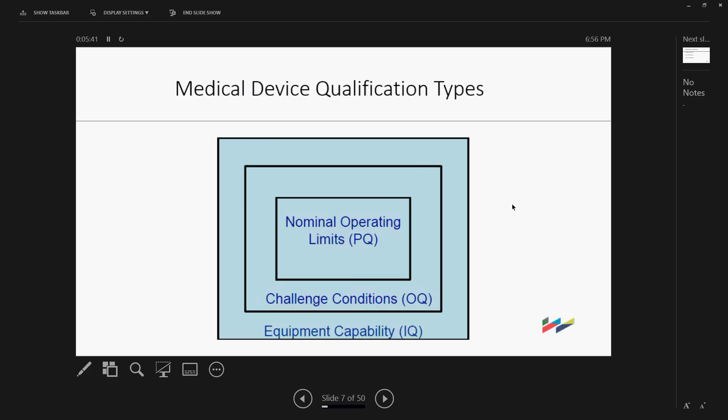Okay. Oops, there we go, okay.

So in qualification, for equipment, they have 3 phases. Installation qualification is the first phase, and the question you should ask yourself is: is the equipment set up correctly, and does the equipment meet its specifications? So if you have 1,000 watts, does it really put out 1,000 watts?

With the operational qualification, which is the next phase, as I said earlier, it's where does the process break? And so once you understand when it breaks, then you've got those limits, those process windows set.

And then the performance qualification is: what are the anticipated process conditions? What kind of variation can you have with your material coming in? What kind of environment - you know, like I work in wafer fabs with clean rooms, obviously you've got to keep those very, very clean. And then, does the process produce product that meets these predetermined requirements?

One of the things I really appreciate, since I got into the game a little late, is the FDA has really endorsed, or investigated I guess is a better word, because more and more medical device manufacturers are going into additive manufacturing. Additive manufacturing has actually been around for about 30 years, but for the last 10 years it's really started to take off. I know with one of our suppliers, they spent almost 2 weeks going through their technology to understand that. So they work with the industry and put this guidance together, which is very helpful as I'm putting together my performance qualifications to do that.

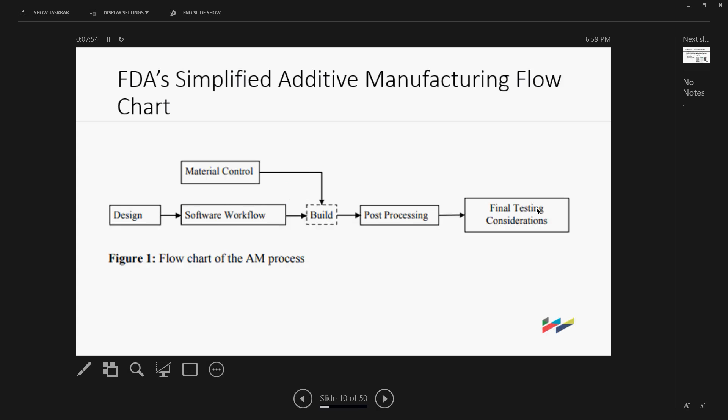Then you have the build, or what I call fabrication. Afterwards you have some cleanup, ripping off supports, a variety of other things. And then - how do you know your product is what you expect it to be?

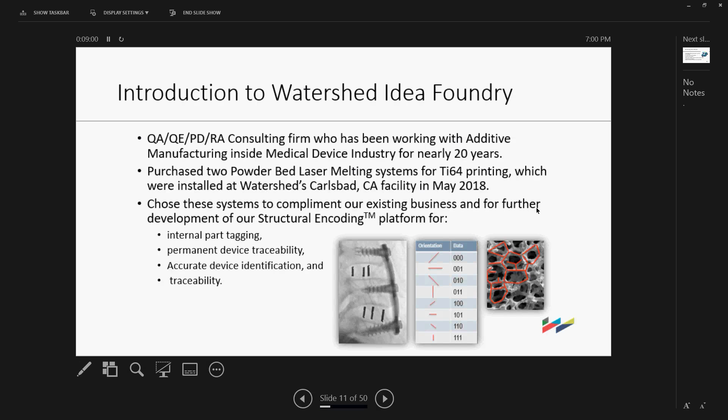We're also involved with some existing businesses, and we do something called Structural Encoding, which is putting a serial number, basically a code, into the device. You can do X-rays, so you have traceability on the whole history of that device. Those are basically pins with little cutouts.

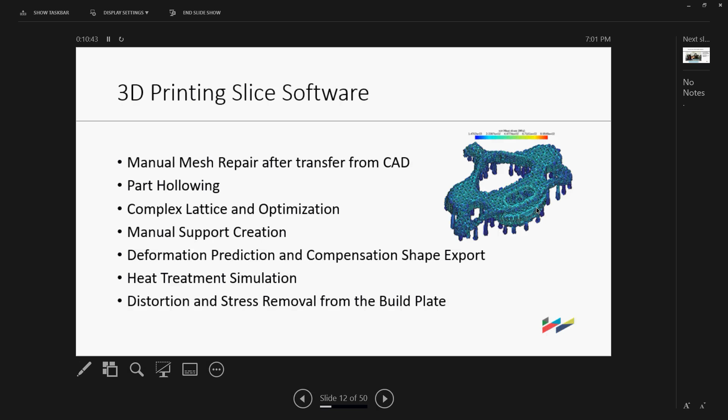It's under a lot of stress because we're at very high temperatures. There's a heat treatment simulation to see if it will address some distortion issues, and they also predict what happens when you remove the supports. It's all high stress - what's it going to warp, how is it going to reform?

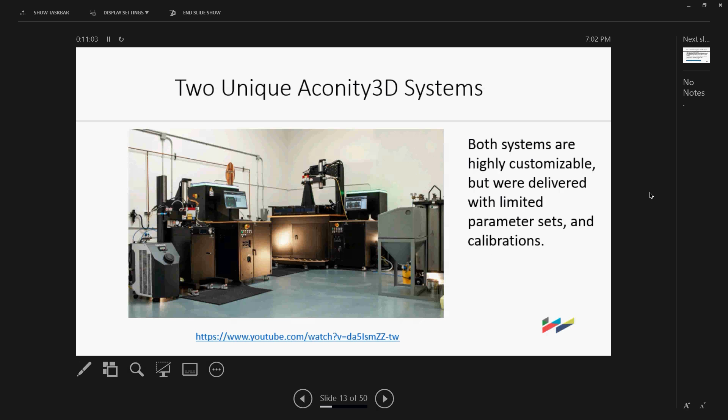Here's a picture of our corner of the manufacturing area. We have a smaller unit on the left, which is our Mini, and it has a smaller build plate - that's where you build the components. Then we have the big system. Unfortunately our video didn't work, but it would have shown you the size of it - this machine is much taller than I am.

This background looks a little smaller than it is. Let's see if we can do the video - I had to find another one just before the meeting. Did you get it to work? Yeah, I thought it was.

The first step of our additive manufacturing process is 3D design. Modeling and processes, so we can take the virtual design and simulate our process in the computer, verify the designs are going to work as intended. Once we validate our 3D design, we will start by printing that in plastic. This is a relatively quick and inexpensive process that allows us to give us an actual 3D part versus a virtual design.

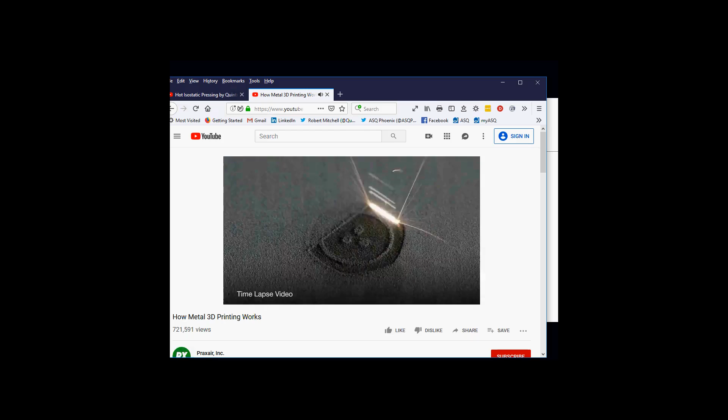We're in our additive manufacturing lab in Indianapolis, Indiana, next door to our powder facility where we make the powders used in 3D printing. This printer has a 400-watt laser. A doctor blade carries the powder across the build plate, and the laser selectively melts or sinters the particles together to form a solid part, built layer by layer.

The key advantage of additive manufacturing is the reduction in raw materials needed to process the part, because only the powder needed for the design is used. The remaining powder is captured, and working with our powder facilities, we can actually recertify these powders as needed.

Once we've printed a part, either in plastic or more importantly in metal, we can scan it and measure the dimensions to validate that we met the design criteria. Additive manufacturing allows for complex parts that cannot be manufactured by traditional machines. This allows our customers to be very innovative, creating designs that weren't possible before, leading to improvements in efficiency, cost, and performance.

All right. Good job, Buck.

One of the other things I didn't mention is the ability to reduce the number of parts. With 3D printing, you can take 5 or 6 interconnected parts, remove the supports, and now you've got a fully assembled device in 3D printing. We actually did our first one last week.

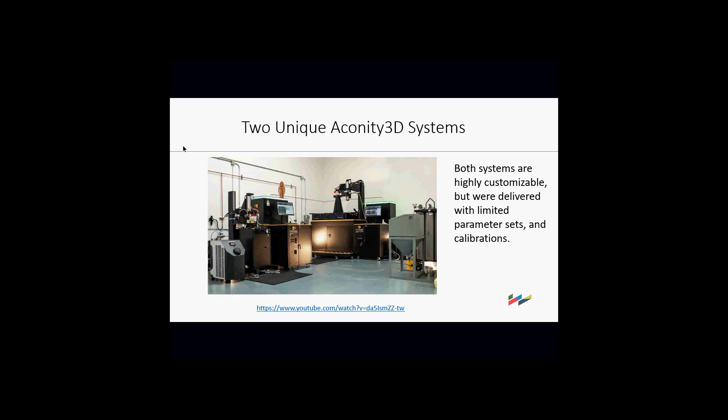Did we lose it? All right, technology. Okay, you're going to be my... Yep, I think. Next.

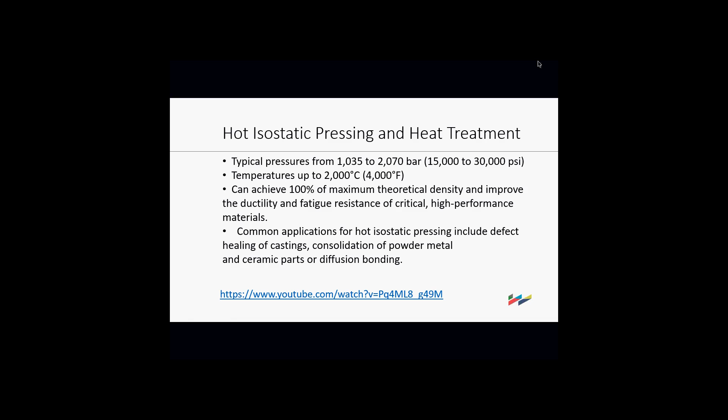I talked about hot isostatic pressing and also traditional heat treatment used in the devices. The typical pressures are 1,000 to 2,000 bar, or 15,000 to 30,000 psi, with temperatures up to 2,000. What you're actually doing is taking the temperature just below melting point because you're trying to move atoms around in the device to get rid of voids inside it, basically pressing them out. If you have a lot of porosity in your device, you're going to end up with a lot of shrinkage. So one of our goals when we designed the process was to try to avoid doing HIP, because it could be a 2-week turnaround time waiting for the product to go through the HIP process. We strive very hard to get the porosity down to a very small percentage. With HIP, you can hit 100%, and I know that for a fact because I've done it.

Whoops, did I do something? Okay, yeah, I'm still not controlling it. Okay... Oops, he went the wrong way. Okay, one slide here and one slide there. Really? What do you got up here? You got the wrong slide up. I know I do, wow. You want that slide? No, actually I want to do the HIP video. Oh, the HIP video, yeah. Oh, now you're going to throw another curve in. I know. I can explain the porosity. Okay, so... Okay.

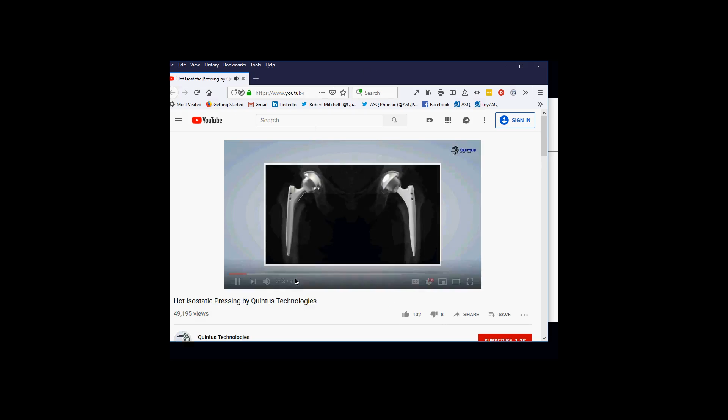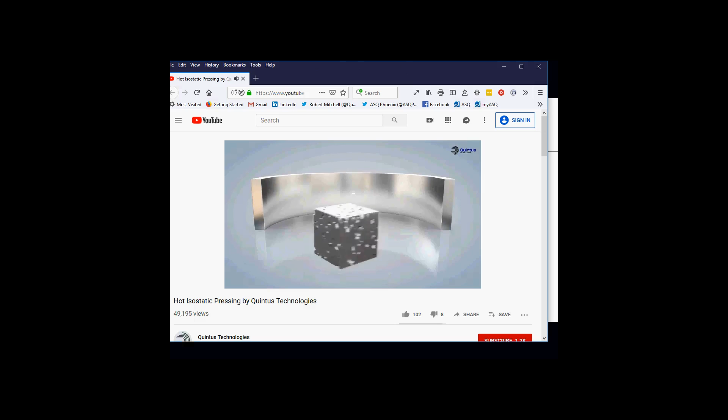We must minimize the risk of inconsistencies with our materials in order to take product quality for granted. Materials formed from casting or additive methods such as 3D printing contain porosity or microcavities. These porosities must be reduced to eliminate the risk of premature breakage. This is usually done in two steps. Firstly, heat is applied under pressure in a HIP process which reduces porosities and cavities. Secondly, the material is heat treated in a process where rapid cooling improves the fatigue and ductile properties. It would be an advantage if these processes could be combined to save energy and increase productivity.

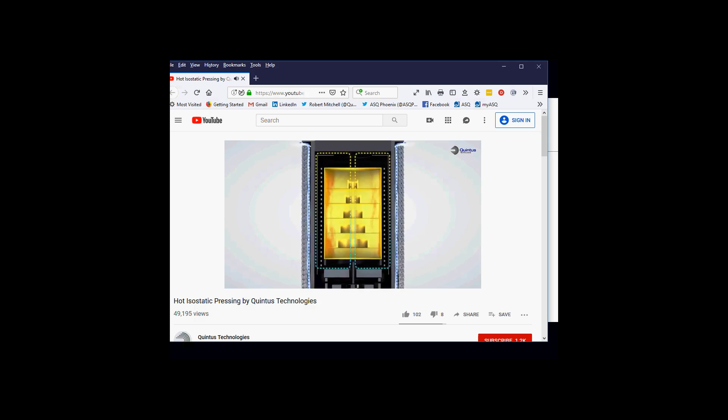But combining quick cooling with high pressure places stringent demands on the pressurized furnace. The vessel needs to be robust enough to withstand the high pressure while also being cooled quickly from the outside. By adding a wire package to the outside of the vessel, both can be achieved. The wire package allows the inner wall to be thinner for quicker cooling, which maintains structural integrity of the pressure vessel. The thinner wall enables a unique heat exchange system, making it possible to cool the load quickly and meet the requirements of the heat treatment process. This means the HIP process and heat treatment can be run at the same time in the same vessel, saving time and energy.

Through the Quintus Uniform Rapid Cooling System, URC, hot gas is pushed towards the thin-walled vessel. At the same time, the vessel wall is cooled by water from the outside, while being supported by the wire package to keep it safe and under control throughout the process. With this unique combination of HIP and heat treatment in one, the load only needs to be heated and cooled once.

You can probably stop that, Bob. Just go ahead and stop. Yeah, I think at this point, you know.

Part of the thing was understanding porosity, and again, that was our goal, to reduce the porosity within the device. So let me get into introduction to interactions.

So in traditional linear responses, you have a... okay, yeah.

Go back to the cubes. Where do you want? Right there.

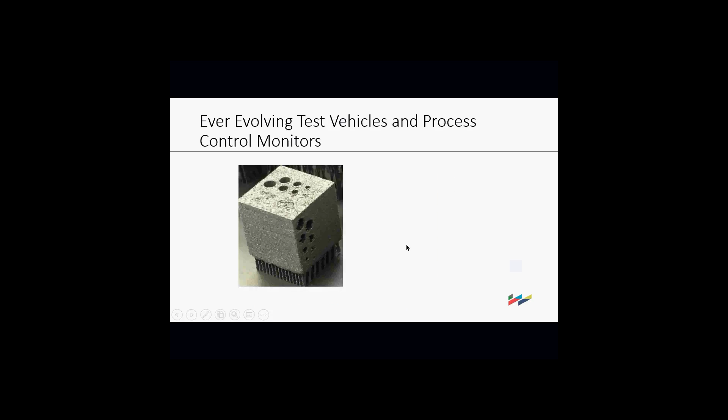This is a very early version of our cubes, and we started off with cubes. The technology with cubes is basically through holes. A lot of things with holes are very challenging because when you're doing 3D printing, you're actually making a series of triangles - that's the way the technology works. So trying to get a nice curved surface is very challenging. That's why we started off building cubes.

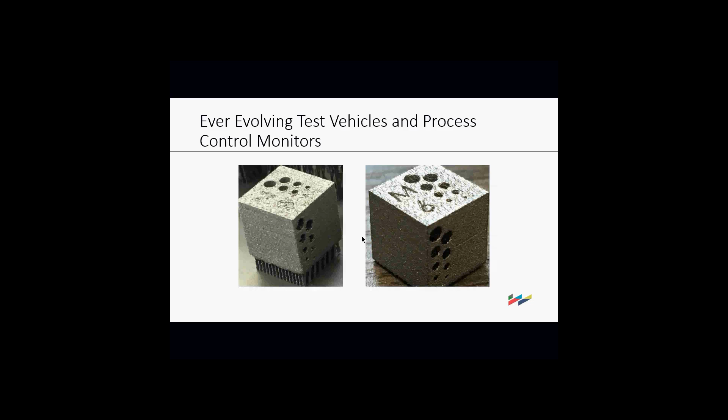You can see the one on the left - the cubes don't look that good, it's a little dark here, but the side holes are really bad on this one. Then as we learned the technology and the factors that affected quality, we ended up - you can read the M6 on this one, with the other you can't read the number. We had holes that are not perfect, but pretty close. The size is 10 millimeter by 10 millimeter by 10, and the smallest hole was about 0.02.

When you get into design of experiments, traditionally back in the day you'd do one factor at a time - dial it up and down and see the effect. One issue is you're not able to detect when some factors are actually interconnected, so you miss all the interaction effects. By doing design of experiments versus one factor at a time, it's much more efficient - you get high precision, understand the main effects, the big ones, and also see the impact of interactions. A lot of processes have interactions involved.

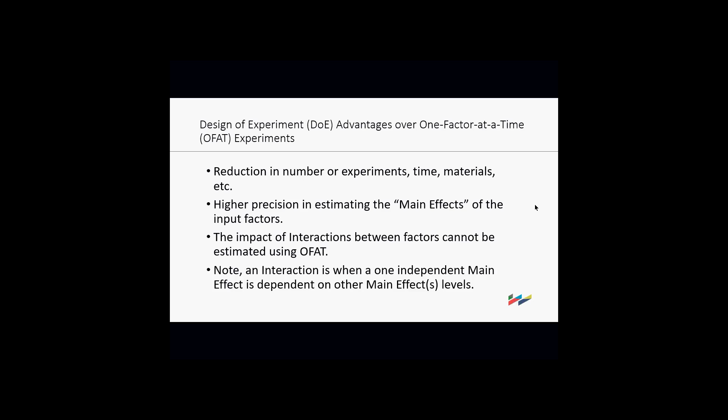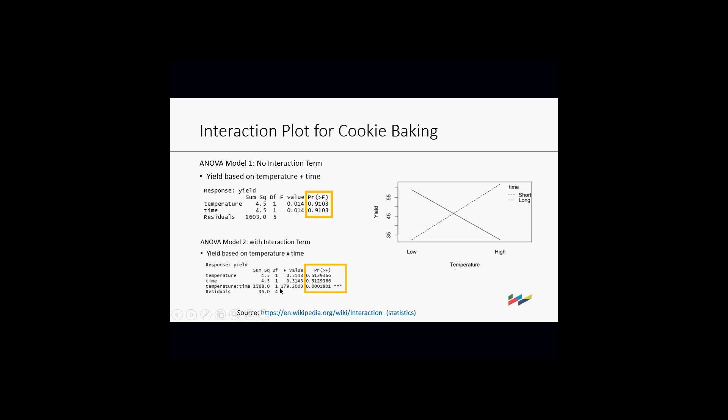So again, we're looking at the main factors, temperature and time, and that's not what's driving this process - it's the interaction between temperature and time. If you only look at one factor at a time, you're not going to detect this. In a lot of processes, you can miss something very important.

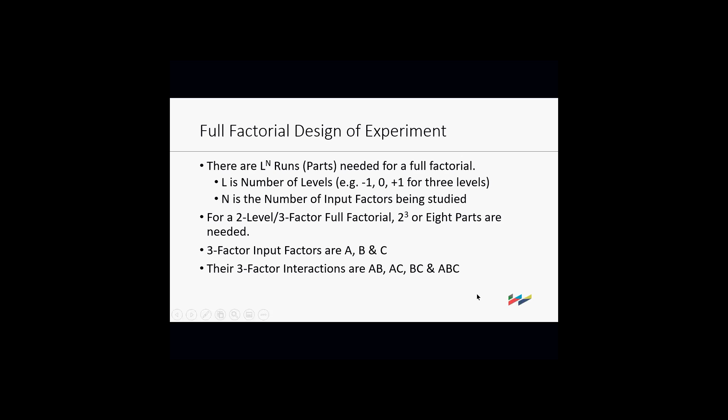So, full factorial design of experiments - you have the number of levels, so -1, 0, and 1, meaning high, medium, and low. Then you have the number of input factors you're studying. If you want to look at a 2-level, 3-factor full factorial, that's 8 parts or 8 runs for your DOE. Your main factors are A, B, and C, but then you have all these interactions - potentially between A and B, A and C, B and C, and ABC. So as you increase the number of factors, this obviously gets very complex pretty quickly.

Here's one example on bearing life. In the technology they used, there was an interaction that they did not detect for decades.

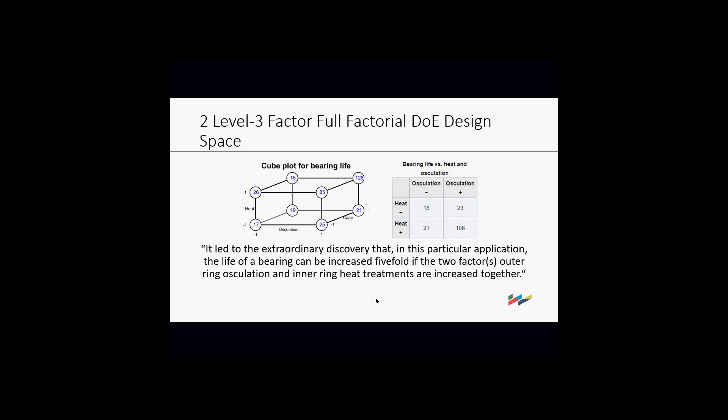What they were looking at was osculation and heat, and it wasn't linear. If you controlled both at the same time by raising it, you didn't get just double, you got a 5-fold improvement in life.

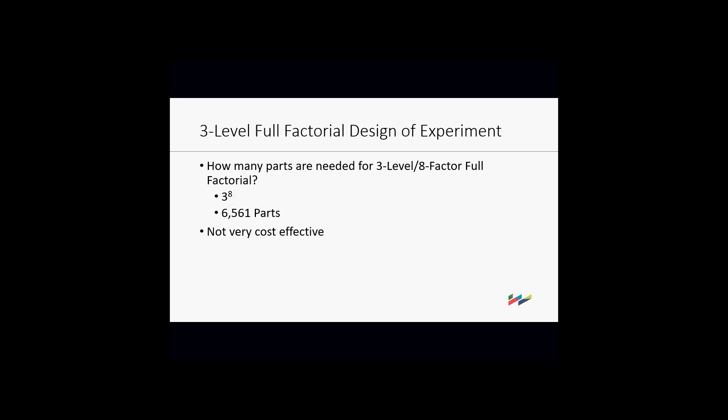This is where we talk about the methodology. I'd like to introduce you to coefficient of determination if you haven't seen this before. This basically gives you a sense of the strength of your predictive model. They take their data points of actual results, try to fit a model to it, and the difference is your amount of error or lack of predictability.

The traditional one they look at is R², but there's a condition with R². As you add more and more factors, it improves it, or appears to improve it. If you're looking at 8 factors and add more interactions, it'll improve the prediction, sort of.

But what they've done, probably a few decades old now, is R² adjusted, which gives you a much more accurate value. If the factor you added to the equation doesn't add more predictability, you take it out.

For medical device work, usually 70 or 75% means the model will predict the accuracy there, and if you get over 85%, I will use that as a predictive model.

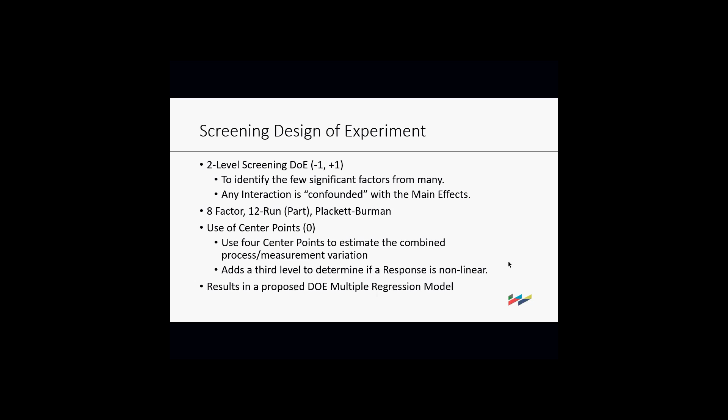So what the hatches are - I don't know if we picked that up, I guess we didn't see it in the video. My video would have shown it. But we actually do an outline of the laser before we do the inside, because it sort of encases everything in there. The laser goes back and forth.

And since it's a round item, that's why you do this outer loop - contour, is what they call it. And then you get that very linear pattern. So how far - when you hit the laser, it actually melts. Let's go to the next one.

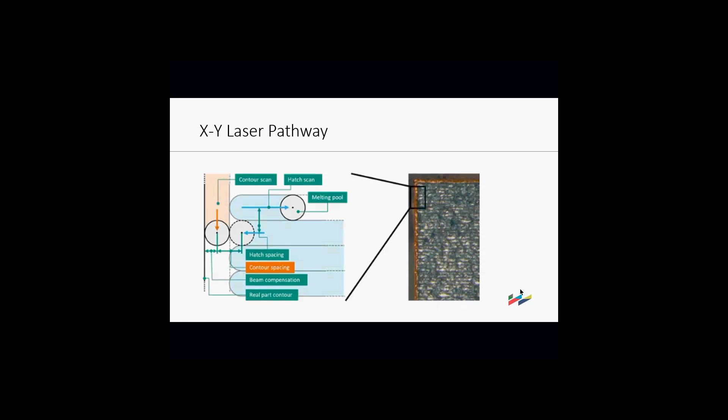Okay, so as the laser's going down, it's expanding. You have to do an overlap here, because if you don't, you have powder there, and then everything falls apart. You have to melt into the next layer, but you don't want to melt too far down, because then you're losing a lot of energy. So this is basically the laser going across - you've got powder here, and as it melts, it develops this, and cools as you go by.

One of the things I was involved in was teaching at UTEP, working with their facility in 3D printing, and some students I think were from Slovakia. Laser power over mark speed over hatch distance, and layer thickness, is how thick you melt it to. That seems to work in a lot of predictions fairly well.

Excellent question. So what we do is we actually pump down the machine using argon. We were able to get - a lot of our competitors are using about 100 ppm of oxygen, because titanium is very, very active with oxygen - that's why it keeps it shiny. So we actually go down to 25 ppm, and in that environment you're not going to create too much oxide. Good question, very good.

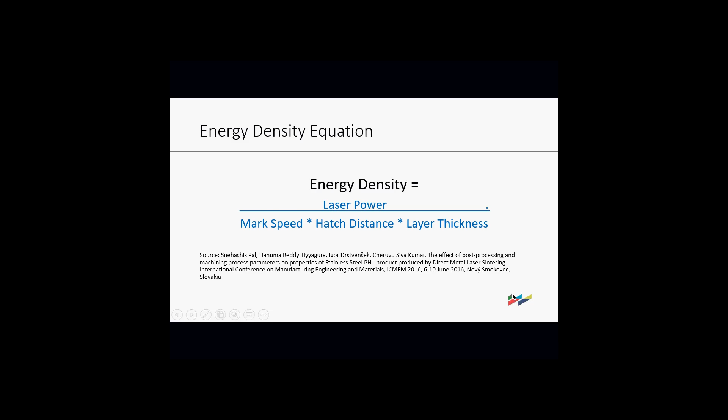Okay, so we did the screening experiment - you sort of know what the big knobs are. With the fractional factorial, it's another stage in the methodology, and one of the things it leverages is sparsity effects. So AB interactions, BC interactions - those types you see all the time, but ABC, ABCD interactions don't happen too often. So fractional factorial takes advantage of that. There are some things that will violate that, but most items don't.

Then the DOE has a defined amount of resolution. We have mixed factors with the interactions, and main effects independent - so you're getting a little more separation there, but it's not the full factorial. Full factorial is able to delineate all the different interactions and all the different factors.

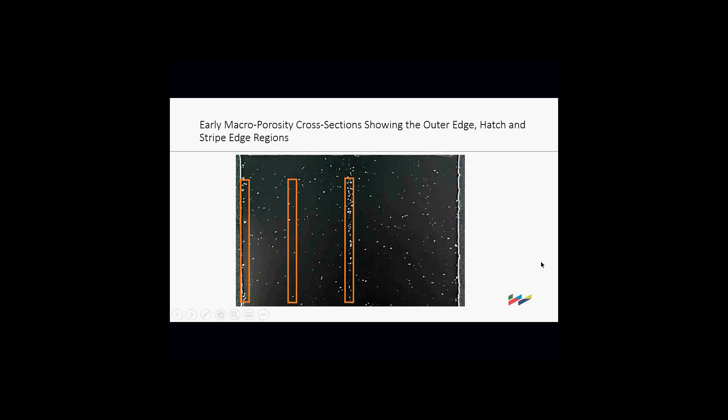So what we learned fairly quickly was we don't want those inside edges, because there's a lot of porosity there. This is pretty high porosity, and this is very early in the process.

So we did a porosity fractional factorial, and with this one, again the constant is significant - laser power and mark speed we've seen before, and we have an interaction there. But because of the fractional factorial, I can't tell the difference between an AB or a CD interaction - they're mixed together. But if I look at AB, laser power and mark speed, I'll put any money that's the interaction I'm actually having - it's AB, because when main factors are significant, most likely the interaction is too, though you don't know for sure.

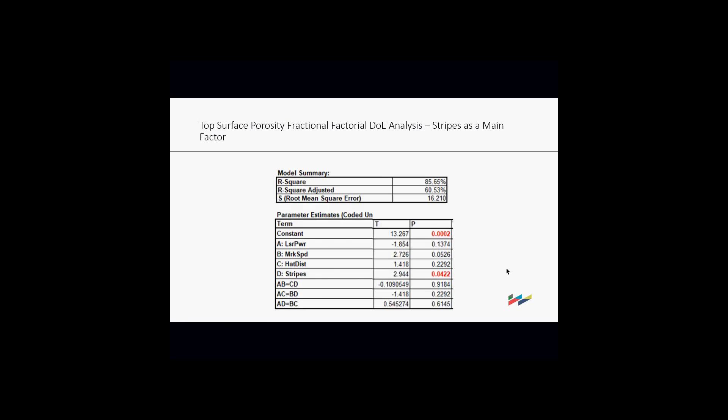Then we did a top surface one, and we had stripes as the main factor causing the response in the fractional factorial in that middle zone I was showing before. Again the constant is there, but this shows that different responses can have different factors or interactions involved.

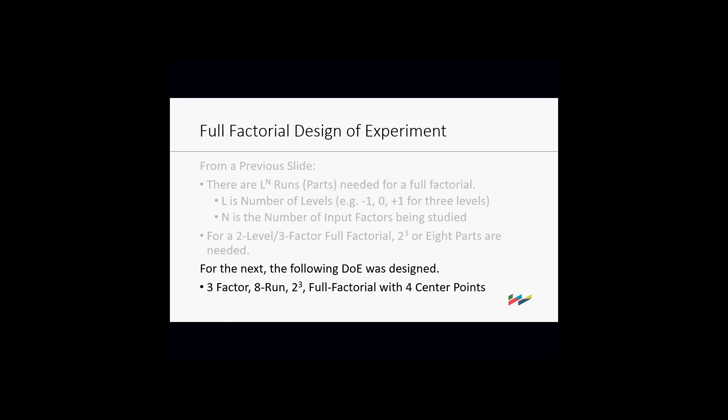We've gone through this before - the next DOE was the 3-factor, 8-run, which we talked about very early - full factorial with the 4 center points.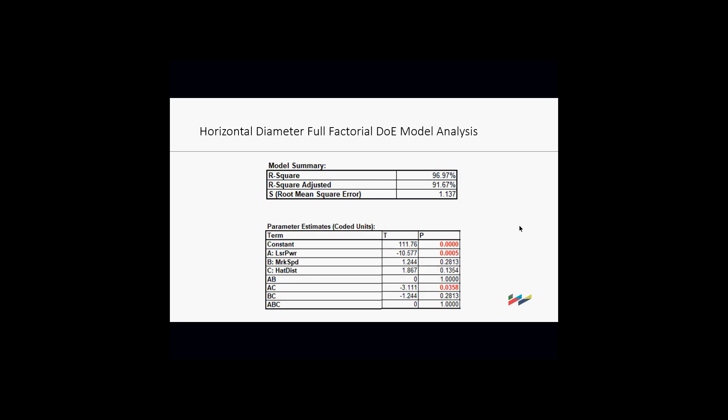So the final approach in the DOEs, a series of DOEs, is doing a response surface methodology. If you have indications that you have curvature in your responses, then the response surface is the endpoint. If you don't, full factorial is your endpoint. So it gets into your second order polynomials.

So DOE design - think of it as a cube, and you've got points on the corners, you've got points in the middle, and this gives you a sense of all those interactions. I also threw in replicates to get a sense of the variation going on in the process.

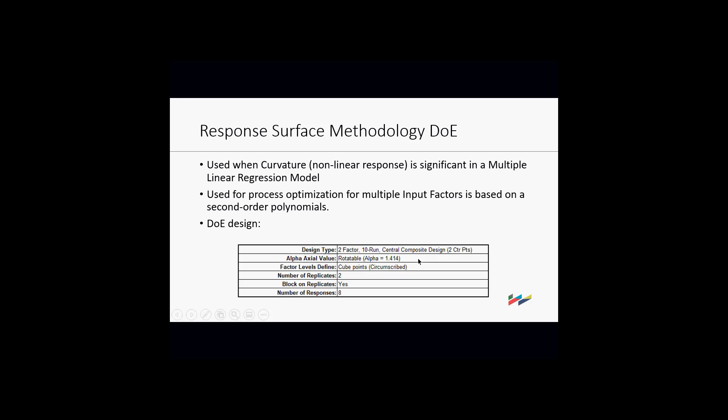With this one, R squared adjusted is not quite as good - 78%, still good - and laser power is reigning the day. Laser power, laser power, laser power - that's the main one you want to control. But you can still improve things by understanding the other factors and how they contribute.

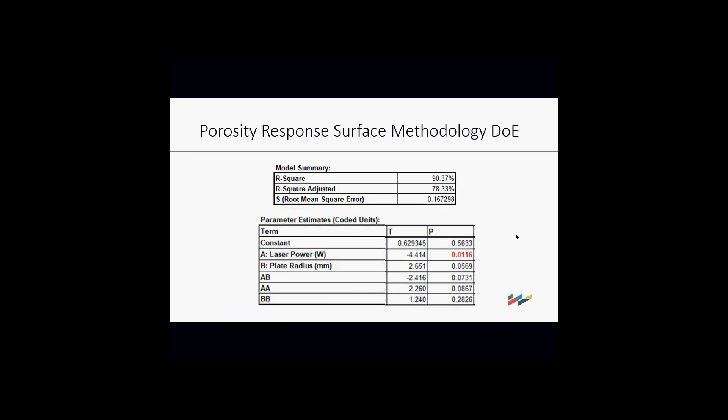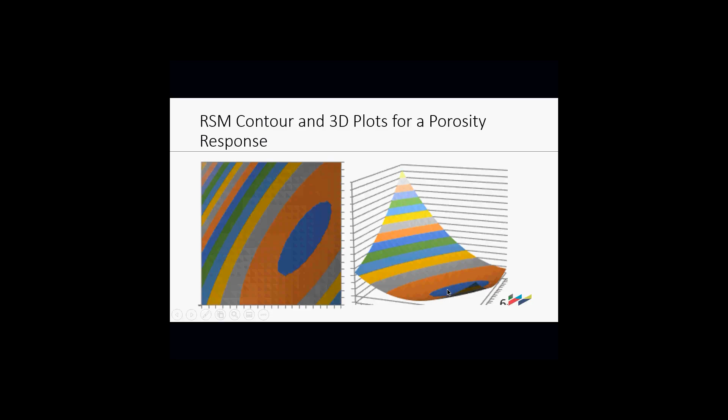So here's the response surface. What we want is porosity. If I run the process over there, I get really lousy porosity at the top. But there's a little blue zone at the very bottom, and that's where I want to be. The bigger that donut is, the more safety factor you have in your process - so that's where you want to be.

So paired t-test is a traditional test that quality engineers use when comparing pairs - you have one device, the other device, here's the combination of those, so you have them in pairs. Here's the t-test, and you do your null hypothesis and the alternate hypothesis.

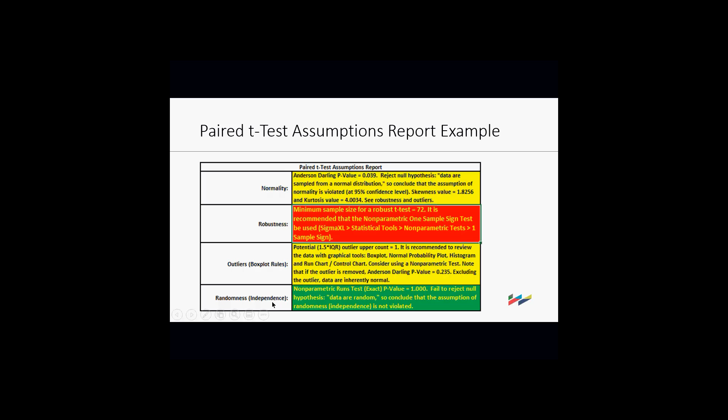And so that's what got me into the non-parametric tests. What they do is a one sample sign test, and they're basically looking at the median, so it's not sensitive to the edges - it's sensitive in the middle. So if you've got this really long tail on your normal distribution, this isn't affected by that.

So what you do is say, hey, I believe the median is about 23.7, which is group 1. And group 1, group 2 is very different. If it was the same, you would have sort of 5 and 5. So these groups are significantly different, and the one at the end is also different. Once you understand that, you go investigate why those are different.

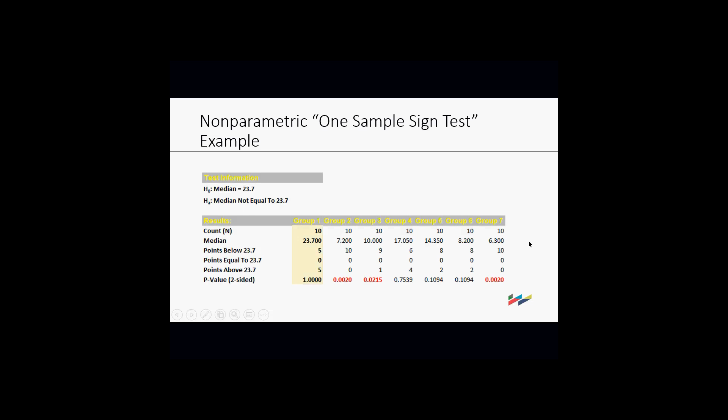So hopefully this gives you a sense of process optimization, including validating the equipment - IQ, OQ, PQ - which is a key deliverable for the FDA. You can look at that. Designing experiments has many advantages over one-factor-at-a-time experiments.

Generally, 2-factor interactions are fairly common. And then doing a cascading DOE where you start off with many factors and you're down to the main factors and the interactions. And then the energy density, I continue to reinforce.

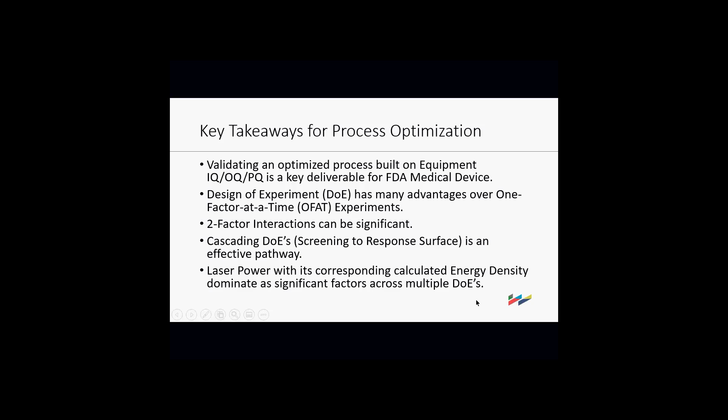That is a very good prediction. We were able to get less than 0.1%. Actually, they can't measure the porosity on our products now. So we have made a decision for implants, we'll still HIP, just because the FDA likes it. But for instruments, we don't have to HIP. So we made a really nice breakthrough to get to 0.1% and less than that.

You've got R-squared adjusted. It's a better measure of predictive strength. And then you can use nonlinear regression techniques to improve your models. And then the one sample sign test actually is very efficient. I like using it, over the traditional T-test.

And then we have densities up to 99.99%. You've got tensile strengths of almost 1,000. Yield strength over 800. And then one of the things with medical devices, you want it tough. So they look at elongation, that it doesn't crack because of the elongation. So you want it in your body to be tough and actually a little bit of flexibility, which you're able to build in with 3D printing, which you can't do with subtractive.

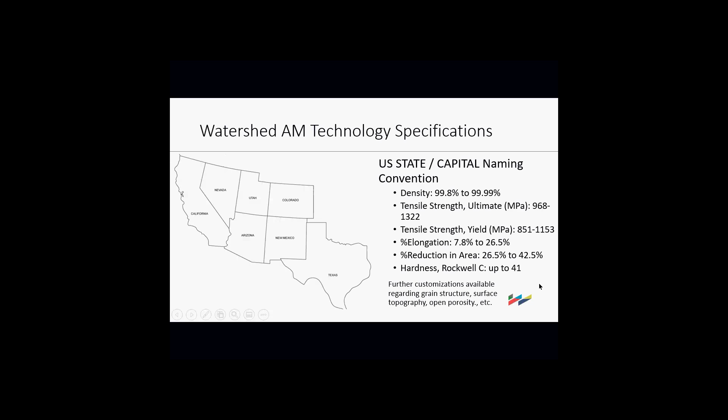Okay, and then I had a lot of help. So one of my friends, I actually knew him in Dallas, but he's now in Houston, and so he's my... I've been blessed with very good statisticians working for me, but I'm not a statistician myself. I don't know a lot about it. John is an amazing one.

Okay, so thank you. Appreciate it. Yeah, got some questions? Any questions? Well, okay, Tim.

Yeah, so I was wondering, when you do the compression treatment at the end, does that come up for like, changes in, say, tension? Absolutely. So again, you've got all these little voids in your device somewhere, right? And so with the HIP, you're just under melting point, under high pressure, and it's squeezing out those voids.